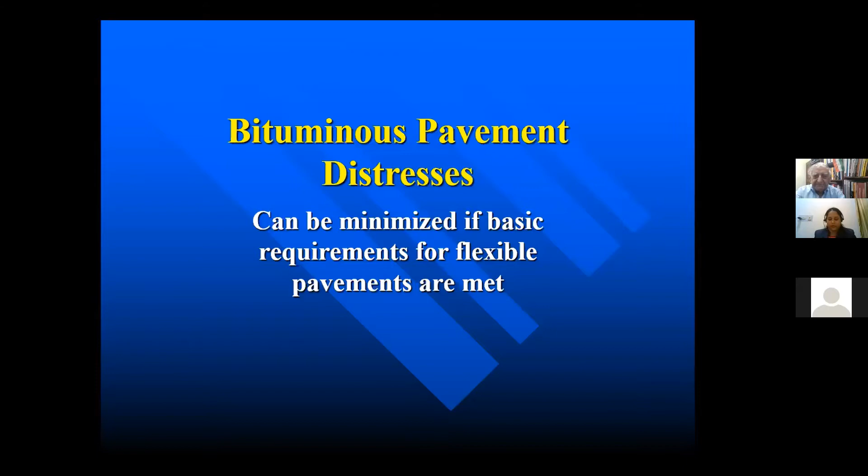Basic requirements for a flexible pavement: as you know, rigid pavement consists of cement concrete, while flexible is bituminous pavement. Three things are very important for the success of a flexible pavement, and these are drainage, drainage, drainage. That means we can never overemphasize the effect of drainage on road pavements.

Second, sufficient thickness and internal strength to carry expected traffic. We have to design our roads with sufficient thickness.

Excuse me, I'll just close the door.

We have to design roads with sufficient thickness based upon the traffic. Higher the traffic, more the thickness. The pavement should be adequately dense to prevent penetration of moisture from underneath, sides, and surface. And the top surface of the bituminous pavement should be smooth, waterproof, skid resistant, resistant to wear, distortion, and deterioration by weather. These are some of the fundamentals we have to keep in mind.

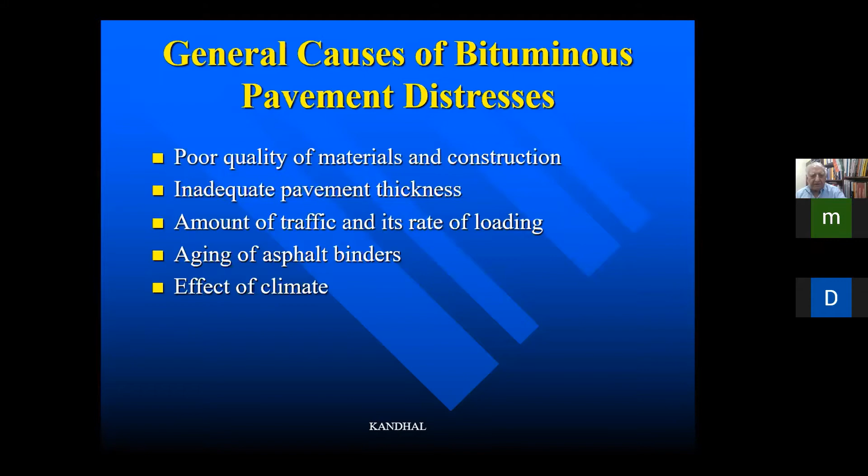Everything has a life to it. Then the effect of climate is important. If you have more freeze and thaw and wetting and drying, they do have a toll on the life of the pavement.

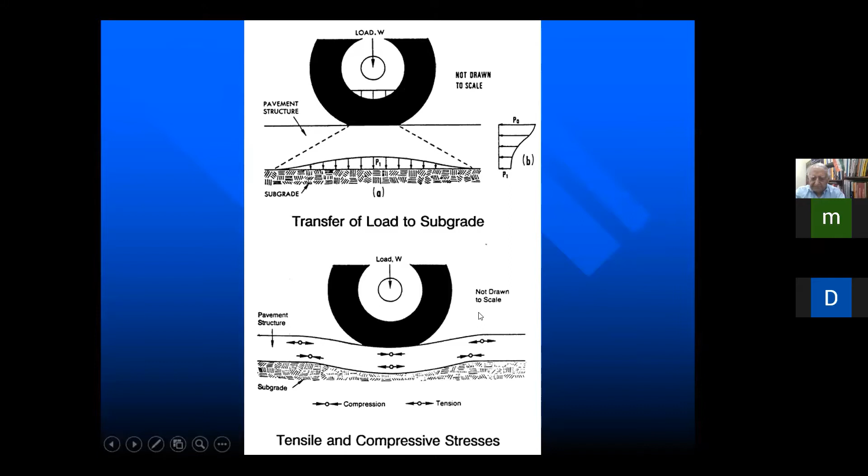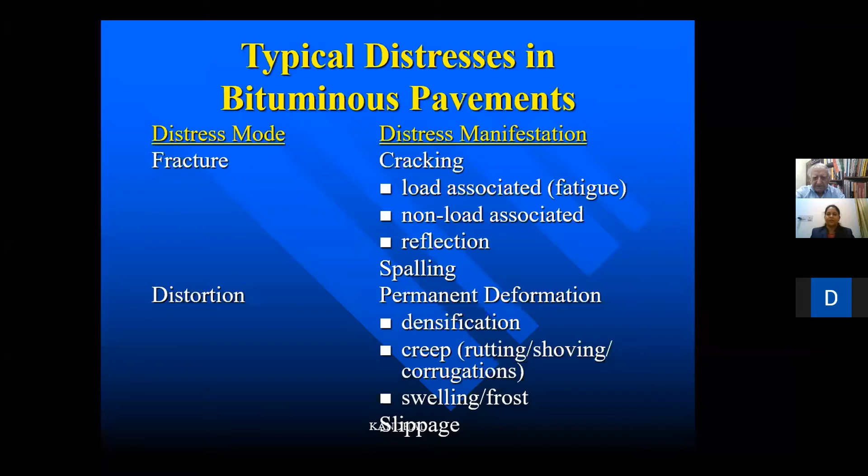Then we also have slippage, which is also a kind of distortion. The third distress mode we have is disintegration — the pavement is just falling apart, disintegrating.

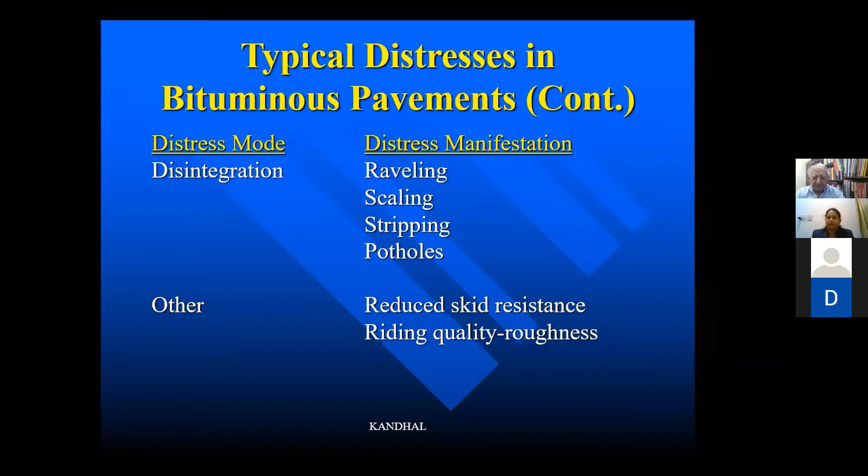So now we will talk about each distress I described in that table. Let me talk about cracking of bituminous pavement — that's like a fracture, the distress is fracture.

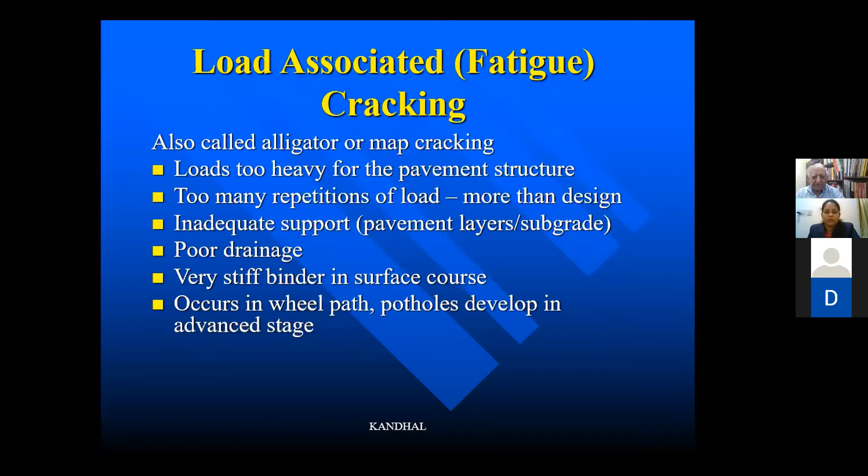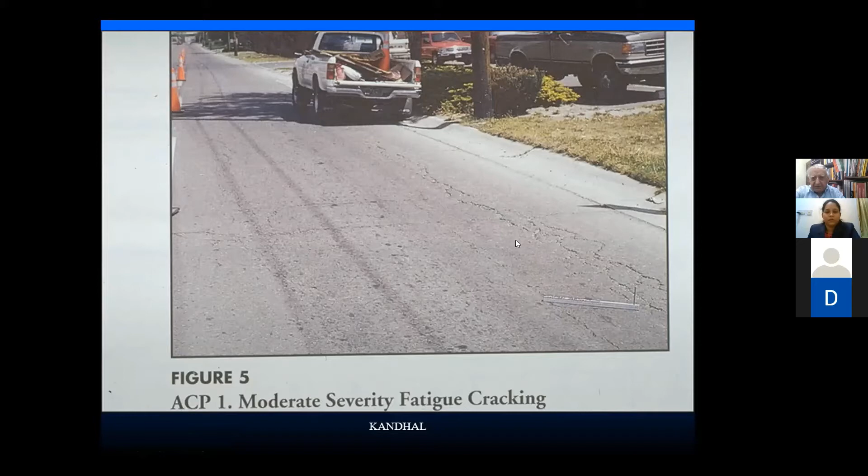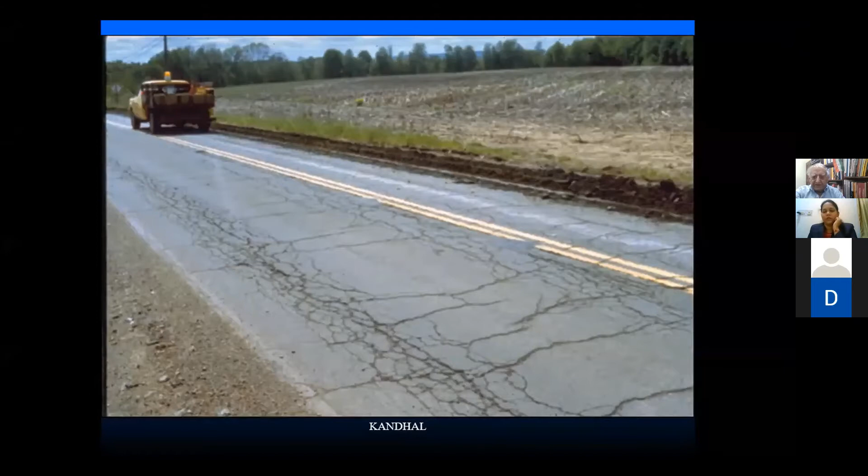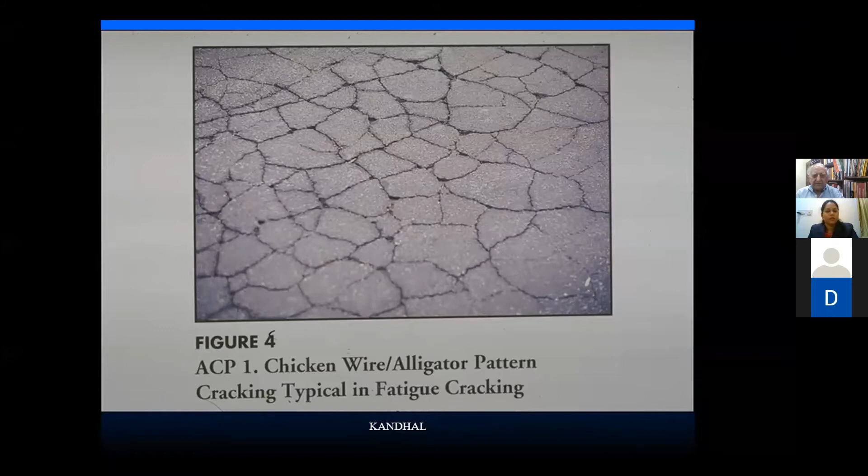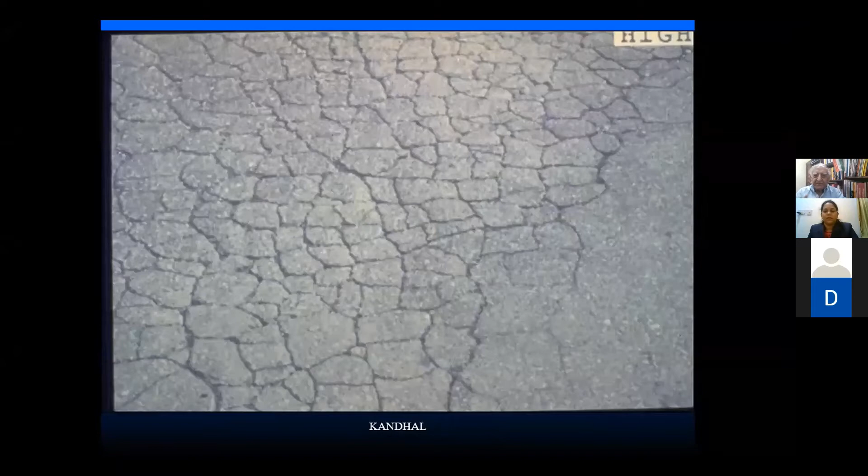Here is a close-up of the fatigue cracking. As I mentioned, we also call it chicken wire or alligator pattern type cracking, which is typical in fatigue cracking. Here is another example of the alligator type cracking. Once it's in an advanced stage, that's how it will look.

So that was the load associated cracking. Now I'll talk about non-load associated cracking. It's also called thermal cracking because of the temperature. Transverse cracks will occur at regular intervals because asphalt binder is too stiff at low service temperature.

This kind of thermal cracking will occur in areas like Ladakh and Leh in India. We are not concerned about this in most of India, only in the Ladakh, Leh area we have to take care of this. I had the privilege of conducting a workshop for the Border Roads Organisation in the Leh area, and my thrust in the talk was how do we build roads in high altitude, low temperature conditions. This was one part of the problem we have as thermal cracking, because if the binder is too stiff at low service temperature, then it will happen.

It will also happen due to rapid chilling of the road surface. If a cold front comes from the north, which happens in the northern tier states of the United States, there is no Himalaya between Canada and the USA, so chilling winds, cold winds, come all of a sudden from Canada to the United States and cause this kind of problem.

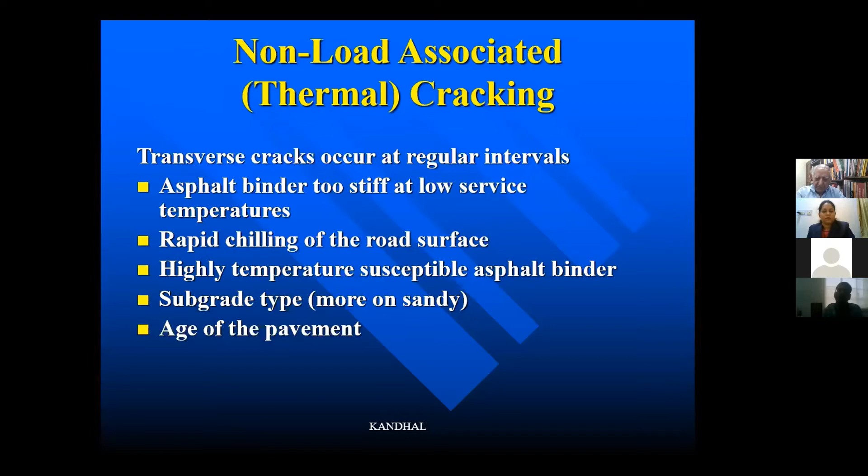Subgrade type matters: thermal cracking will be more frequent on sandy subgrade than clay. Also, the age of the pavement matters, as the asphalt ages it oxidizes and becomes stiff, so it cannot give in when the pavement is cool. This is mostly relevant for the BRO, Border Road Organization, in the Ladakh area.

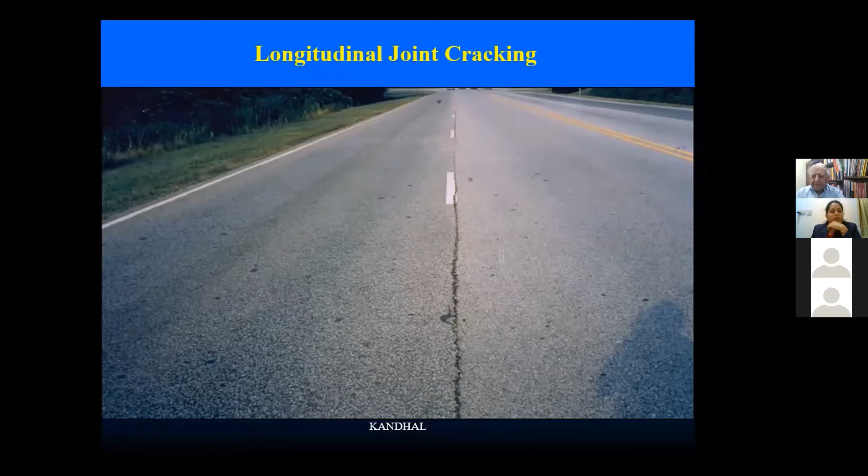There are many different ways this longitudinal joint can be constructed so that no crack happens. I had the privilege of investigating 8 different types of construction joints in the US, and I published 5 or 6 papers on those, covering different techniques for how you can minimize or eliminate this cracking. So this is the joint between adjacent lanes, occurring because of the density gradient across the joint—low density and high density. This will occur, and sometimes you'll see it more on airport runways because there are so many joints there.

Pardon? Can you hear me? Mazula sir, can you hear me? Yes, sir, yes, sir, you can. Okay, there was some voice, that's why I thought—yes, some participants unmuted, okay.

So this is a construction joint which we have to take care of by properly constructing it. Then there's also edge cracking, which I'll show you a picture of—it happens when we widen a road. It can also happen because of lack of lateral support, and lastly, it can happen because of poor drainage, when I don't have good ditches to take care of the surface drainage on the side.

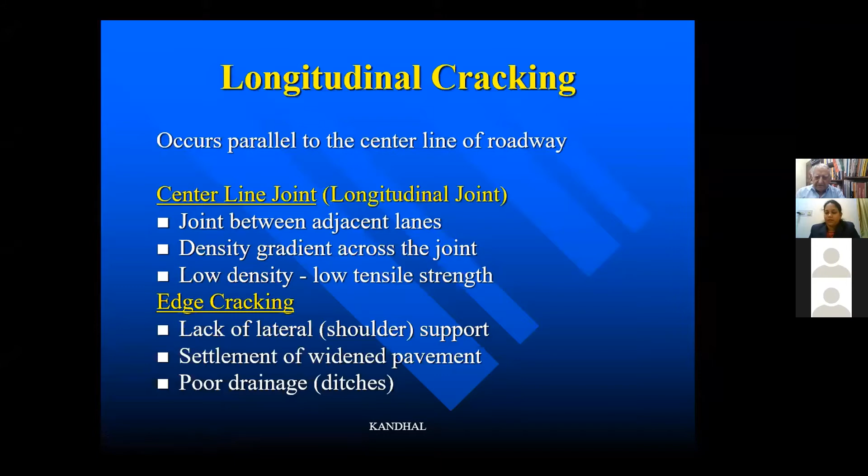This pavement was up to here, and then I widen it, maybe using different types of materials. After doing it like 8-10 years, I may not have the same kind of material, but still this will happen because I widened it. So this crack will always happen. It's called edge cracking, and we have to seal it off all the time.

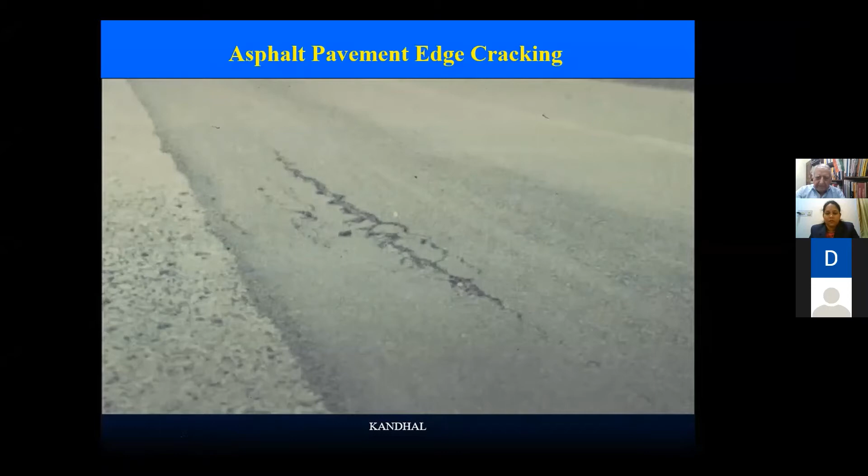Then we talk about block cracking. In block cracking, we have both transverse and longitudinal cracking. I'll show you a picture of that. Most often it's on low volume roads or parking lots where there's hardly any traffic, because thixotropic hardening or structuring of the asphalt binder takes place due to lack of traffic and heat.

Let's say if I build 1 kilometer of road and don't put any traffic on it for 2-3 years, and then I build another kilometer of road and open it to traffic, you will see after 2-3 years that the 1 kilometer of road which didn't have any traffic will develop this kind of cracking, because the asphalt bitumen binder develops a structuring, or hardening. It acts like cement concrete. And as you know, if I put cement concrete and don't provide any joints, it will crack. So that's what happens here.

So asphalt does need some traffic and heat. If you can heat up that bitumen layer, it will be restored back to its softness. But we cannot do that. So this is what happened here.

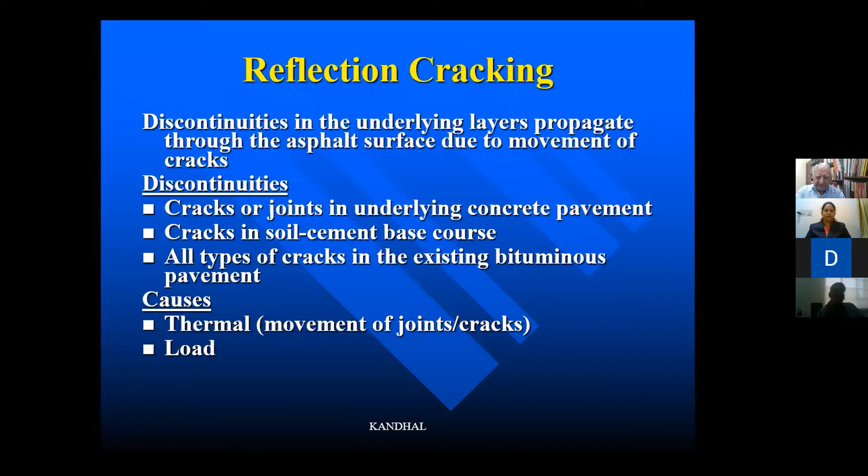So if you are going for a forensic analysis, somebody asks you, okay, what is it?

Is it a thermal crack or a reflection crack? I don't want to speculate. In forensic science, you should not speculate - that's what we mostly do in India, somebody goes out and says 'oh, this is what it is' and then you take care of that. I believe in verifying it, and understanding why it happened before I treat it.

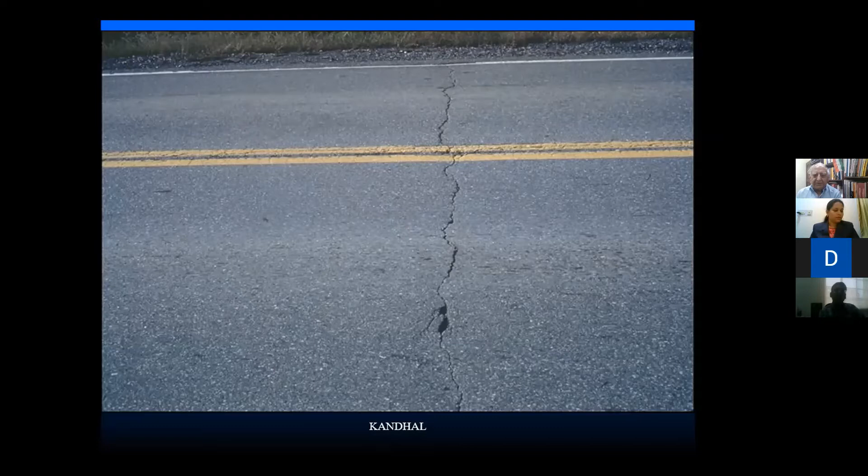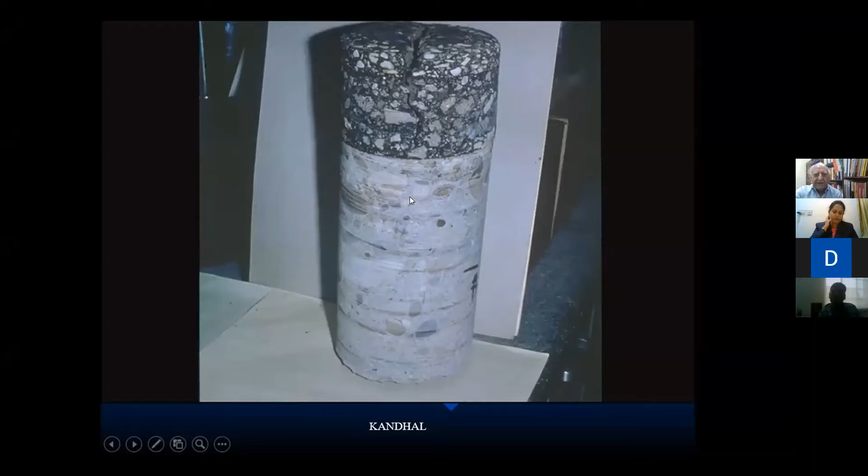So what I'll do is take a core right on the crack itself. Here I took a core, and there was cement concrete underneath. The crack you can see in the bituminous concrete here, but there is no joint here. If it was a reflection crack, I would see a joint or crack in the cement concrete. I don't see it here, so it's not a reflection crack, it's a thermal crack. That's how we find it.

Now, how do we treat this? Suppose we have a cement concrete pavement and want to put an asphalt or bituminous overlay on top - I know that reflection cracking will occur. One method highly successful in the US is that when I put a bituminous wearing course on top of cement concrete, right over where the joint was in the concrete, I saw a joint and seal it with a joint sealant. So I'm already creating a weak line there, so when reflection cracking takes place, it will take place there, where the joint is already sealed. That's one way we can take care of this.

So how do we take care of the cracks? Cracks should be sealed as soon as possible, so there is no water penetration in the pavement which may cause further damage. As I said, water drainage is very important, so we must seal the cracks as soon as possible. If it's very narrow, 2 or 3 millimeters, we cannot seal it, but when it becomes somewhat wider, then we can seal it.

Asphalt rubber is considered the best material for sealing cracks. Unfortunately, we don't have that in India, and mostly people put asphalt binder like VG10, VG30, or emulsion, and that doesn't work out. It's always the case that when the joint narrows due to expansion, the sealant comes to the surface and gets tracked by traffic. And in emulsion we have 35% water, so that evaporates. So what we need in India is asphalt rubber as a crack sealer.

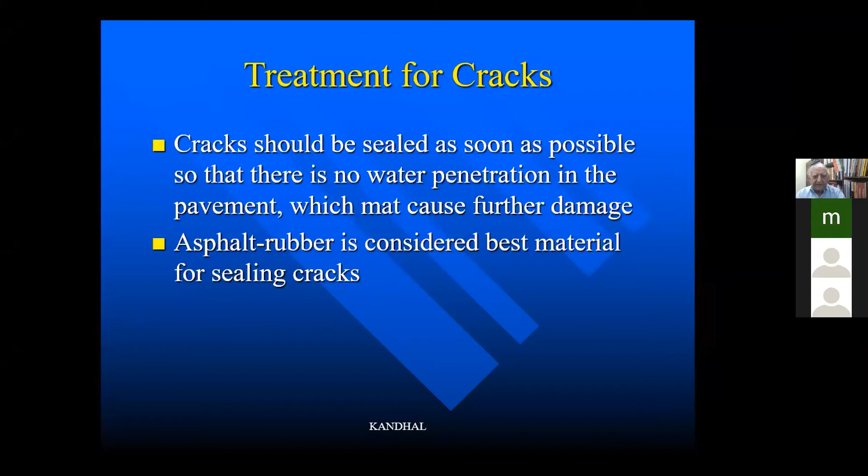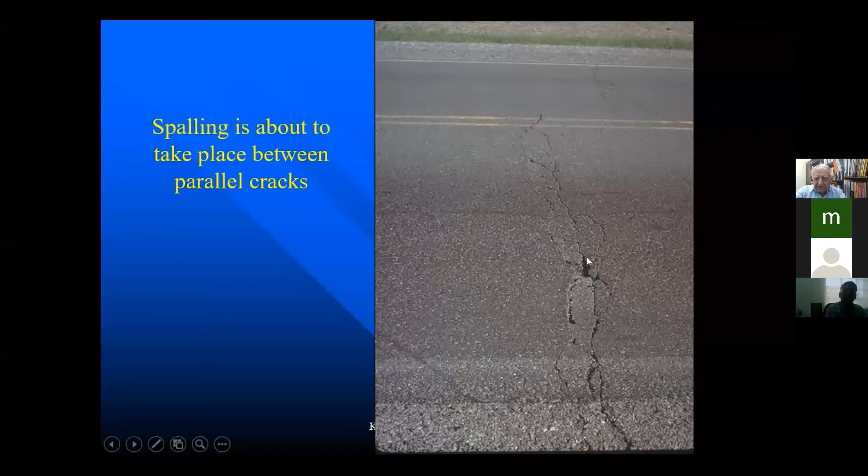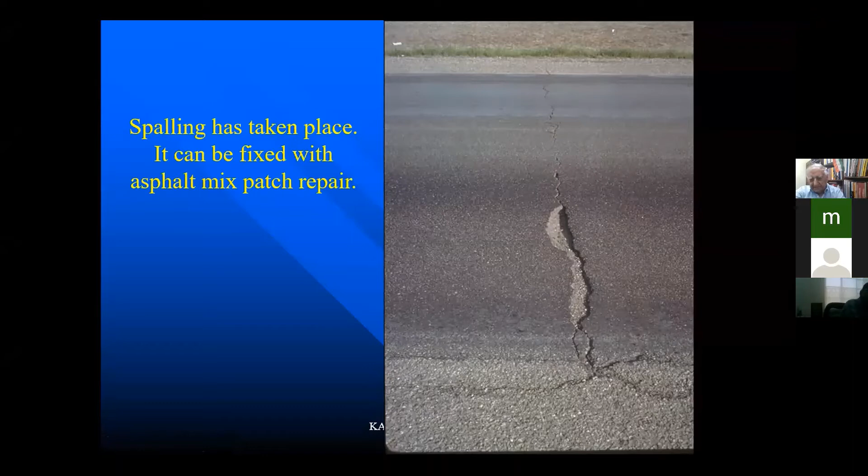So if I have a crack here, you can see it. If I don't take care of sealing it, as it develops, it will develop secondary cracks because I did not seal the primary crack. And once that happens, I can get spalling, because between the two cracks, the material is spalled. So we must seal the crack as soon as possible - as they say, a stitch in time saves nine. That's what happens here. Now we will talk about rutting.

Rutting can occur because of lack of adequate subgrade support. Those who know about pavement materials know we have the subgrade at the bottom, which is the natural soil. If that is not very strong, it won't provide good support, and so the whole bituminous pavement which I put down will settle down and cause rutting - ruts on the surface. So that's because of the subgrade support, and I'll show you how to identify what's happening, at least roughly.

Rutting can also happen because of an unstable asphalt course. If the bituminous concrete or asphalt concrete course is unstable, that means I didn't do a good mix design, so the mix is very unstable. Or I used rounded aggregate - I need to use angular aggregate in my bituminous layer so it has good strength. Or I put too much asphalt binder, too much bitumen binder. All these can cause an unstable asphalt course. The underlying layers might be okay, everything's okay, but the bituminous layer isn't strong enough.

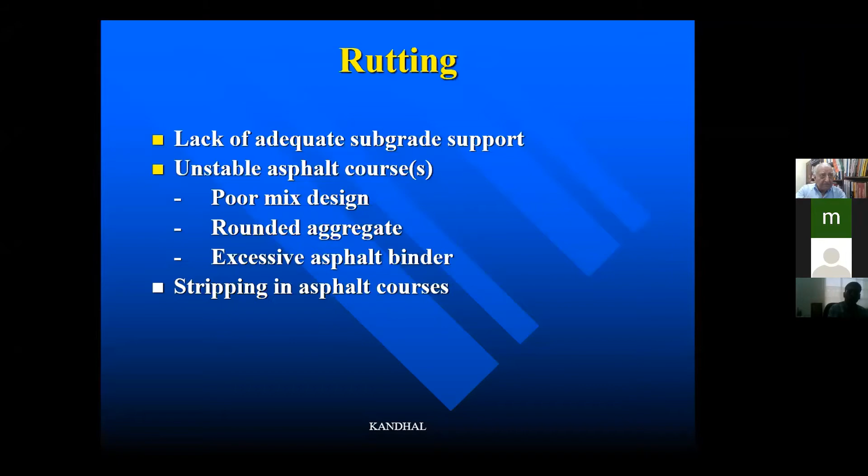My mix design was bad, so all the binder kind of came up on the surface and caused bleeding. We have to take care of the bleeding, because if it is wet, vehicles can start to skid on top of that.

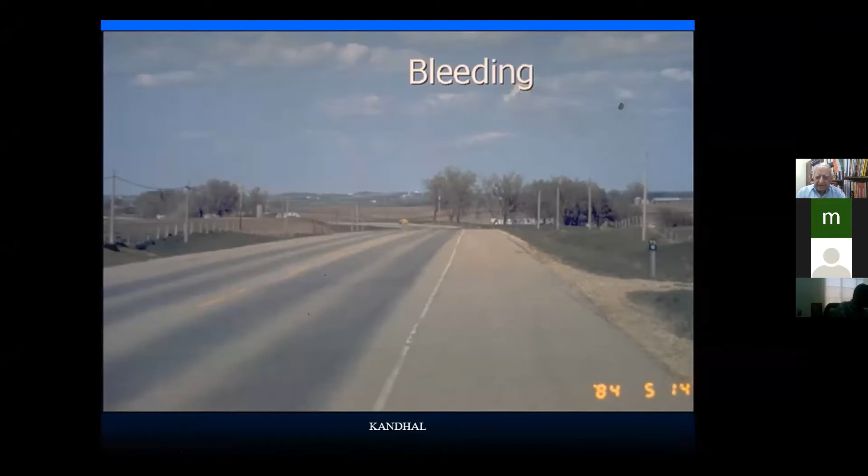Here's another example of bleeding. You can see here again, it's in the wheel track area. So bleeding sometimes can lead to rutting, and sometimes it may not lead to rutting, but still it's not a desirable surface phenomenon. How do we treat the bleeding?

Let's say it happened, I put too much binder there or whatever. So what I can do is apply hot sand and roll it during hot weather to blot out the extra asphalt binder, bitumen binder at the surface. You can do it one time, if that doesn't work, do it a second time. And then after you do that, you just pray to God. It might work, it may or may not work.

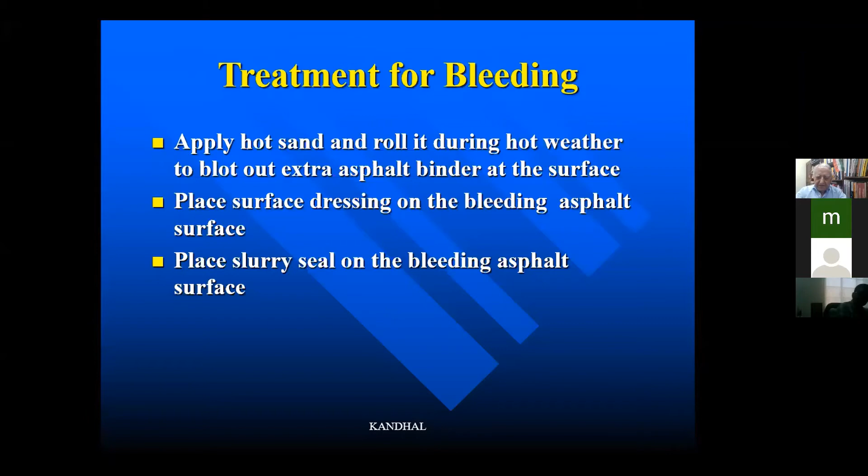If it doesn't work, then you have to do something else, like place a surface dressing, what you call chip seal, on the bleeding asphalt surface, or you can put a slurry seal or micro surfacing on the bleeding asphalt surface. You can do that, but it is not desirable. We got to take care of that.

Now here we are talking about rutting. We said rutting can happen due to a subgrade which is not strong. Rutting can also happen because of the bituminous layer not having enough strength or whatever.

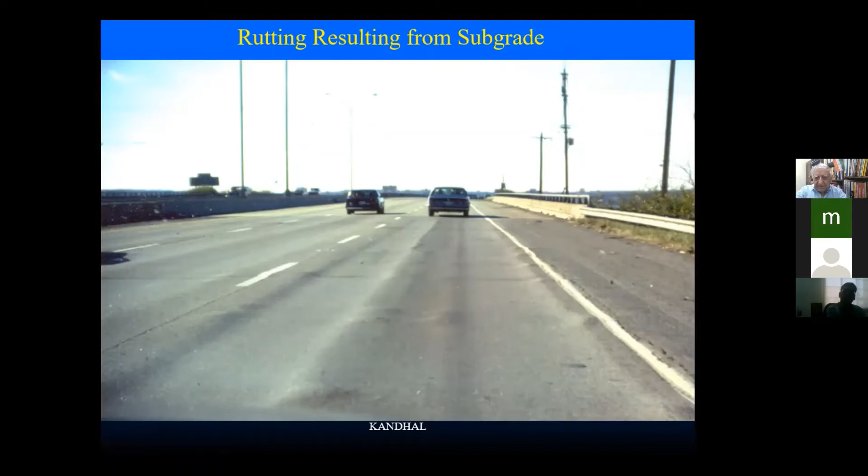But again, you can identify the problem by doing some more exploration. I'm just showing you a picture which can sometimes give some hint why the rutting is taking place.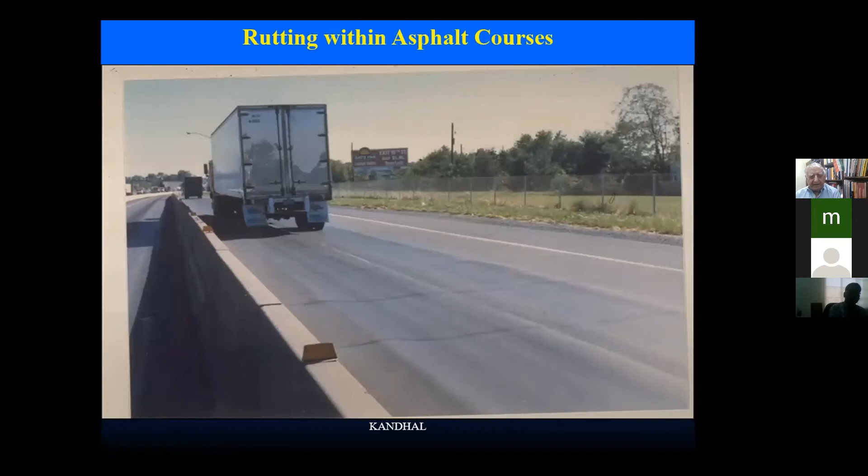Now this is a picture on a national highway in the US, and you can see a lot of rutting in here. But since the rutting here is very, very smooth, you can see there's a flow of the mix on the side, a hump is there, but very smooth. So I would suspect that this rutting is being caused in the bituminous layer and not due to subgrade.

Now here is some forensic analysis which I did in Pennsylvania, between Philadelphia and Pittsburgh. There's a Pennsylvania Turnpike, which has a lot of traffic on it, and it was made of cement concrete, and they laid a bituminous course for the first time on cement concrete.

First they put a leveling course, which was 25 millimeter leveling course. Then they put a binder course, which was 50 millimeters thick, and then they put a wearing course, which was 37 millimeter thick. For the first time, they put these 3 layers on the cement concrete pavement. It's a 4-lane highway with lots of traffic, lots of truck traffic.

So these are the 2 lanes which are open to the traffic. The other 2 lanes are on the other side of the ridge, and they were under construction. So only 2 lanes were open for the traffic which was previously plying on 4 lanes. As soon as they opened this to the traffic, there was about 25 millimeter rut in the wheel track.

So they asked me, being the chief asphalt road engineer in the state, and they called me out, and I went there, and they said we got 37.5 millimeter wearing course, surface course, and below that we have 50 millimeters of binder course. So which one should we remove?

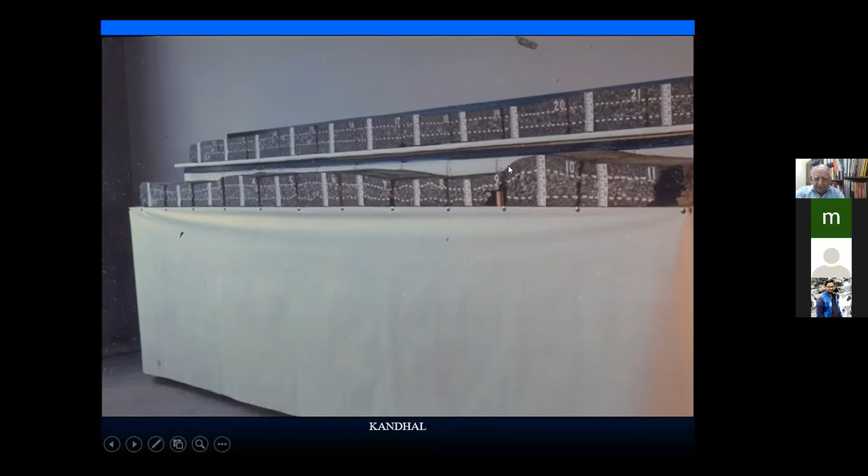You can see here a close-up of this rut, there's a hump here. And you can see in the close-up, here's the rut. You can see the surface course is uniform in depth - no rutting is taking place in the surface course. The rutting is taking place in the binder course. You can see the binder thickness is lower here, and it's humped over here. So this rutting is taking place in the binder course.

So in this case, I have to remove both layers. Although the wearing course, the surface course, is okay, the binder course is causing the problem, so I have to remove that. When I remove that, this is also removed. So if I had advised them to remove only the wearing course, surface course, that would have been wrong advice. This is what you got to do sometimes - you have to do some extra legwork to find out.

Now the second question is, okay, I told them it's the binder course that's the problem. So why is it occurring in the binder course and not in the wearing course? What's the problem? You can see that in the next slide, please.

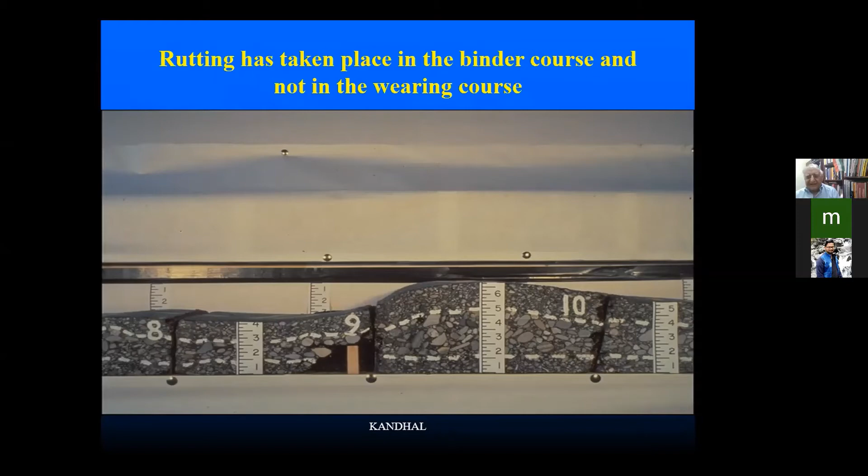By mistake, they used a wrong stockpile of aggregate from Ohio. Ohio was a nearby state, and the contractor, by mistake, used a wrong stockpile which consisted of rounded aggregate, and he ended up using that in the binder course. So you can see here, that was the cause. This is the kind of forensic work you have to do, and for that you have to make some extra effort. You don't want to speculate, you've got to see it for yourself.

Here you can see, just roughly, the kind of rutting can tell you something about what's happening - though not always, you've got to verify it. Like on top, there's a plastic movement depressed in the wheel path with humps on either side. That would tell me the rutting is taking place within the bituminous layer, whether it's the surface course, binder course, or base course. Now below that, I have this kind of rutting, and that tells me it's happening because of the consolidation or densification of the bituminous layer in the wheel path. It's just densification.

There's no movement, no humps in it. At the bottom, you will see mechanical deformations because of the subsidence of the unbound base course or subgrade, and that part is causing the problem. So there's a settlement here of the bituminous layer because the subgrade is giving way. That's the kind of example I gave you before near the bridge approach. So that's what's happening there.

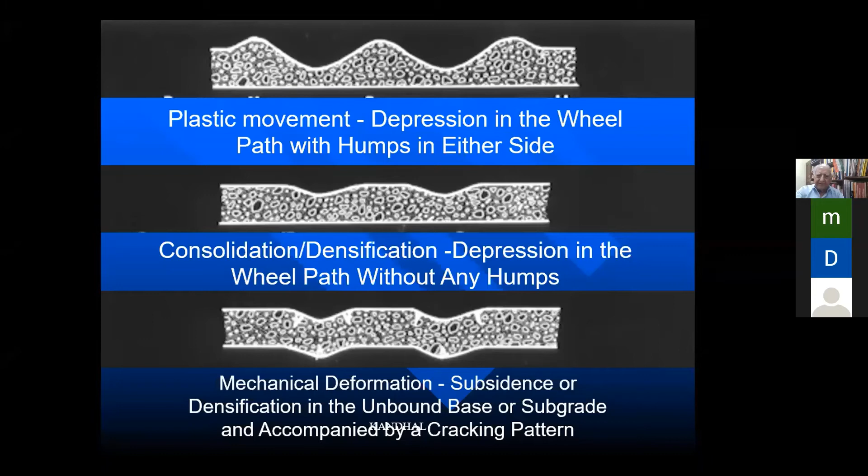These kinds of things can give you some idea, not 100% correct, but some idea about what's happening. But you don't want to speculate on that. You've got to verify that by digging up a trench and making samples.

So how do we do the treatment for rutting? Rutting is taking place, what do we do? You can't just go out, take a look at rutting, and say okay do this or do that. That involves a lot of expenditure. You have to go confirm. You've got to diagnose the problem - that's the forensic analysis, you've got to diagnose. Only after you diagnose the problem can you treat it. Otherwise you are just doing something which may or may not work.

So first, determine the cause and location of rutting. What is causing the rutting? I've got to find that out, only then I can treat it. Any layer exhibiting rutting must be removed or milled off - we have milling machines these days in India also, no problem - completely and replaced with a more stable mix course. So if rutting is being caused by the bituminous layer, you just remove it and design a better mix.

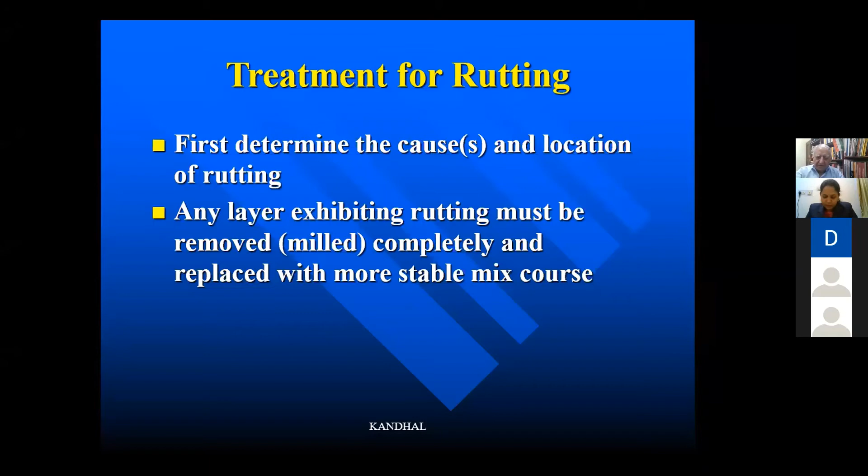Okay, so we have handled rutting and cracking in detail. Now we'll talk about slippage cracking. It's associated with a slippage mechanism because there was a poor bond between the surface layer and the underlying layer.

We normally apply tack coat. When I put a surface course, bituminous surface course, on top of the bituminous binder course, I apply tack coat so there's a good bond between these two. But if I apply too much tack coat, it acts like lubrication. If I apply too little tack coat, it may not give me the bond. So in that case, slippage cracking can take place.

Mostly it will occur on steep grades or intersections. It won't occur on level ground, sometimes it might for other reasons, but mostly it occurs at steep grades or intersections because acceleration and braking exert surface traction force, and they cause relative movement of the surface course against the binder course underneath. They are U-shaped - when you look at this slippage cracking, it appears to you like a U-shape.

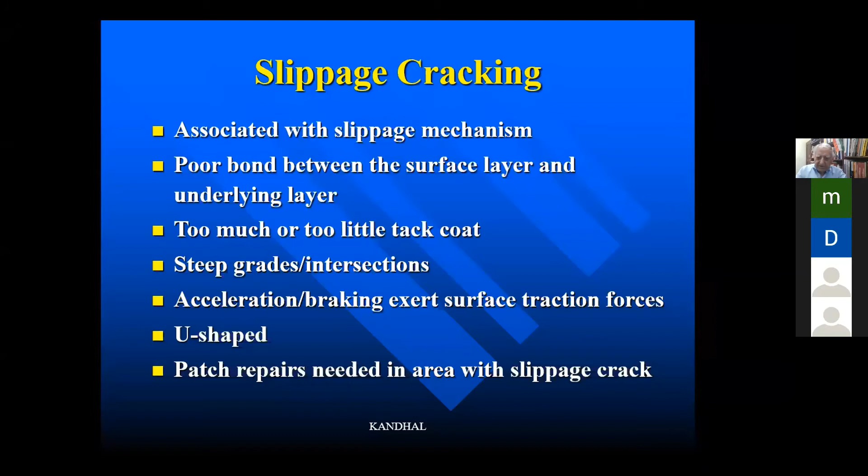So in the area which has slippage cracking, you just dig it out, do some patch repair, and that takes care of the slippage crack in that area because they are not continuous. So here is an example of a slippage crack.

Here you don't see the whole road, but the road is kind of going up or down here. Here's the U-shape, and the traffic is going in this direction. In the US, the traffic is on the right side. So if there is a U-shape here, and traffic is going this way.

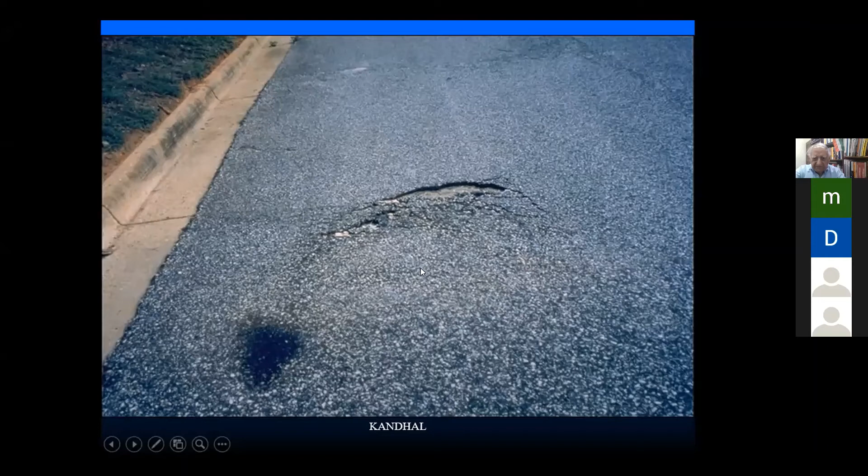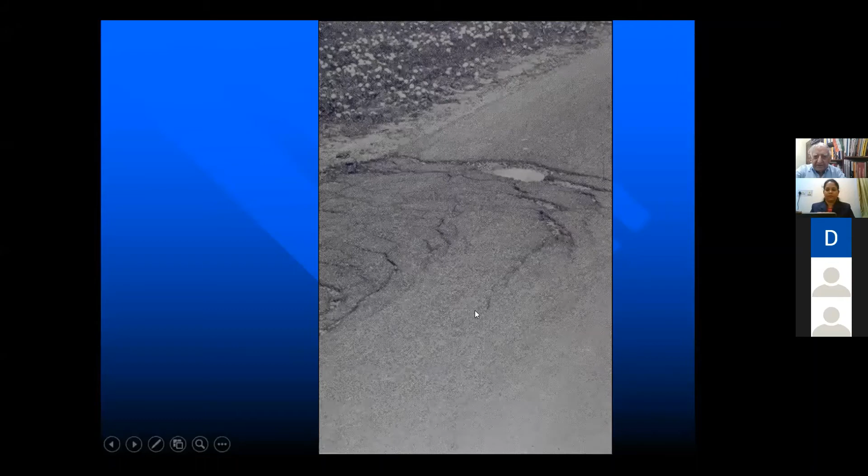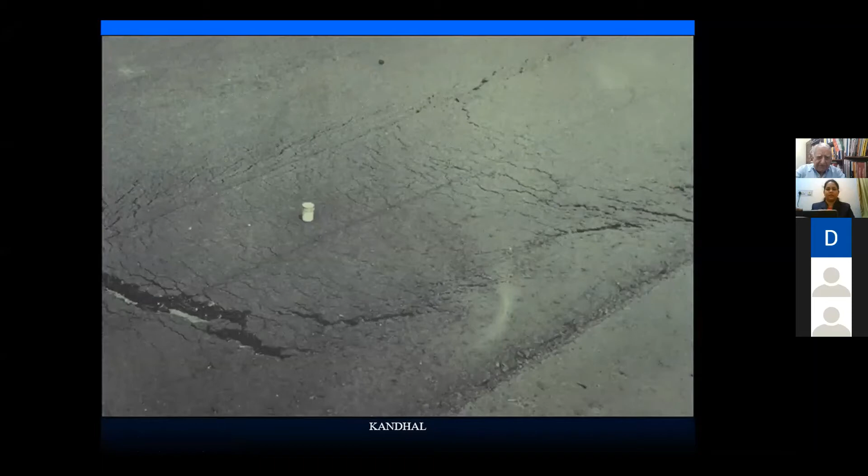Another example of a slippage crack. And again, to correct it, you just dig it out in this area, do a patch repair, and that takes care of it. Another example of a slippage crack. I don't know, I've not seen too much of these here in India, actually.

Now here's some cracking called hairline checking. I'm just throwing in these things because you might encounter them. This will happen when I'm compacting the bituminous concrete - if the bituminous concrete is hot, too soft, then under the roller I might get this kind of checking. So I've got to do something at that point during construction so that I don't end up with this hairline checking or cracking, because later on they can develop and widen and give me problems. It has to be taken care of by either delaying the compaction or doing other things with the mix design - that's another subject.

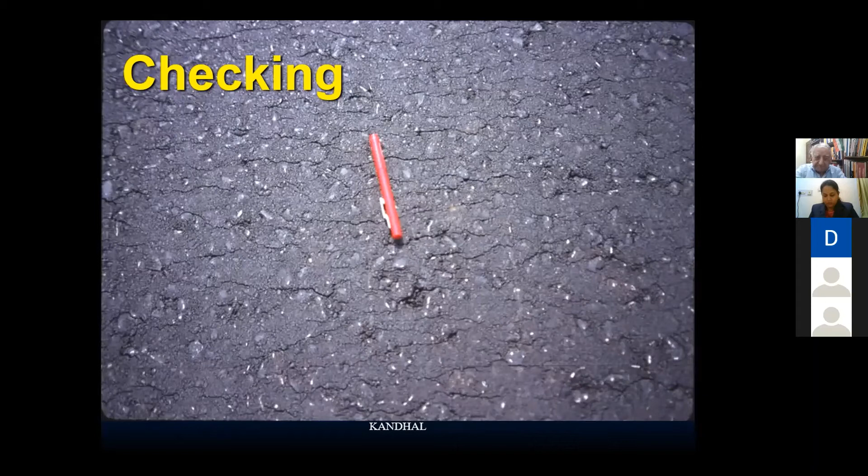I might have corrugations, and that will also happen due to a lack of bond between asphalt courses because of the unstable surface course mix. It will corrugate - you will only feel the corrugation when you are driving, the car will just go thudding. It will happen because of braking and accelerating action near intersections, where you're applying brakes because the traffic light goes from green to red. Areas with corrugations have to be milled off and replaced with a highly stable asphalt mix - that is the cure for that.

Now we come to raveling, which is like a disintegration of the bituminous pavement. That's what we will cover now - raveling, stripping and all that. Raveling is a progressive disintegration of the asphalt surface as a result of dislodgement of aggregate particles in the mix.

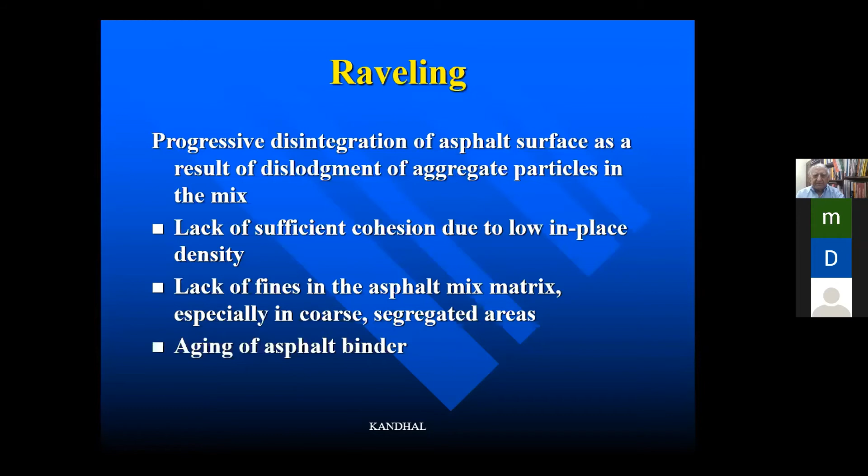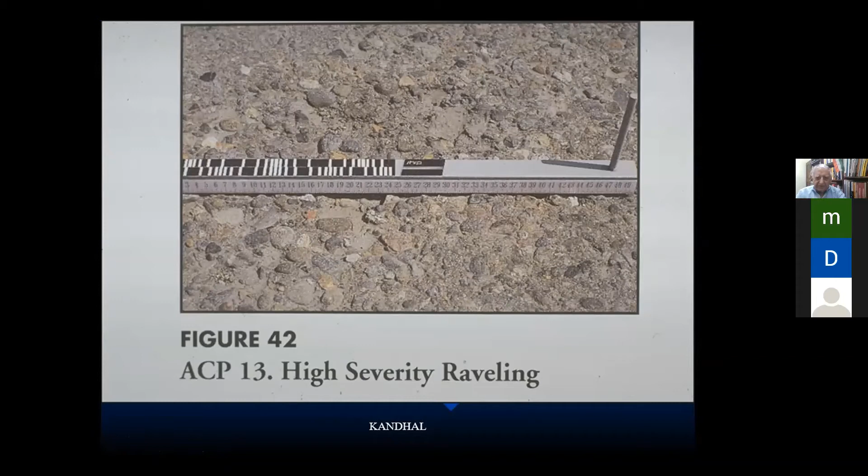Now here is a case of high severity raveling. In this case I not only lost the sand, I've lost some bigger particles as well - you can see these pockets here. So I should have taken care of the raveling when it was slight, but I didn't do anything much about it. Now it has become so bad, it has become severe here.

So how do I treat the raveling? The following treatments are suggested in order of severity of raveling, from slight to severe. If I just have slight raveling, I can apply a fog seal with diluted emulsified asphalt binder.

That's the asphalt with water and asphalt. So I apply just a fog seal, and that will take care of it for 2-3 years. It will provide some binding agent on the surface, so I won't have too much loss of the fines, at least for like 2-3 years.

Not more than that. If it's too bad, then I apply a slurry seal or micro surfacing, which is available in India as well. Or I can put an overlay with a dense grade asphalt mix. I can do that too, depending on how much money I have, and depending upon the pavement, whether it's designed for that traffic at that point in time or not.

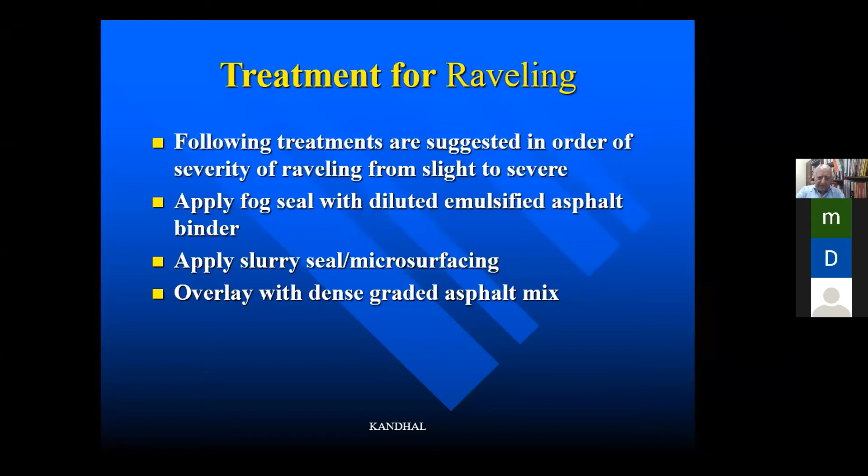In India, there are two mixes which are really bad, and we are still using them. On top, we use a mix called SDBC, semi-dense bituminous concrete, 25 millimeters of it, and since it's semi-dense, it can still absorb water. Water is enemy number one of bitumen. Below that, we use BM, bituminous macadam, which is very open and can also take up water. I've been campaigning for the last 15 years to remove these two items from our specification, but the Ministry of Road Transport doesn't listen.

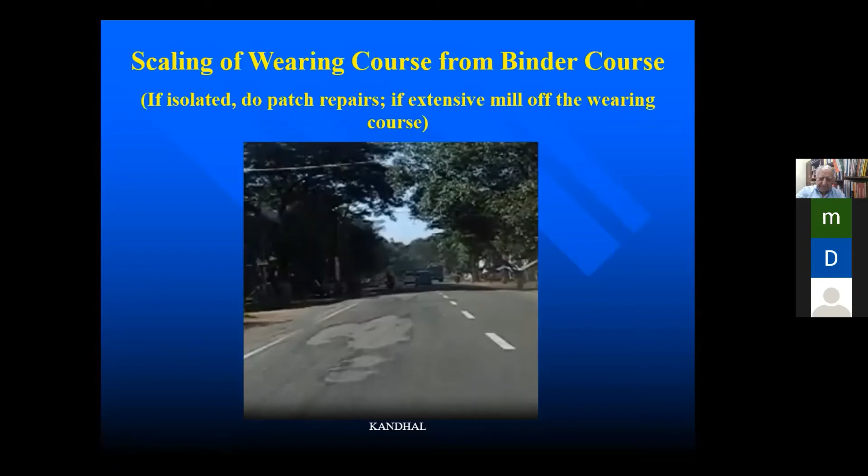Now we come to the problem of stripping, which is very important, and I'll show you some case histories of this problem. Stripping is the breaking of the adhesive bond between the aggregate surface and asphalt binder, usually in the presence of water or moisture. Most of the time it is because of that. The aggregate, except for limestone, loves water and hates bitumen.

So if water is there, it will replace the bitumen. If I have a sandstone or granite aggregate coated with bitumen, and water comes in, the aggregate loves water, so it will take on the water and remove the bitumen binder, peeling it off. The water gets in between the bitumen layer and the aggregate, because the aggregate loves water in that case.

If I have an inadequate pavement drainage system, then again stripping will take place. So pavement drainage is very important. As I mentioned this morning, along with Dr. Sivakumar Babu and others, we wrote a textbook on pavement drainage, published in the United States about 2-3 years ago, where I've given some case histories and forensic analysis I did in the US. Again, it's due to inadequate pavement drainage system, both surface drainage and subsurface drainage.

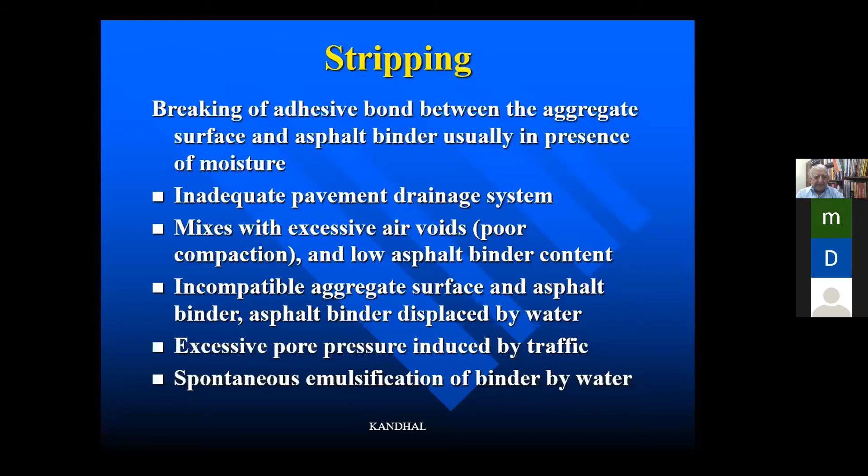Excessive pore pressure induced by traffic: if stripping is taking place and the traffic is very heavy, it will accelerate the process of stripping. Lastly, which is very rare, sometimes the water can emulsify the asphalt binder, and then the emulsion can be washed away with the water.

Let me show you this case history of a national highway in the United States where I did the forensic analysis. After this was put down, after 2-3 years, they had this kind of problem. You can see it's very bad—you spend so much money putting down two layers of bitumen courses, and everything was very good, but within 2 years you see potholes developing and a lot of patching. You patch here, then a new place develops a lot of potholes, bleeding, and all that.

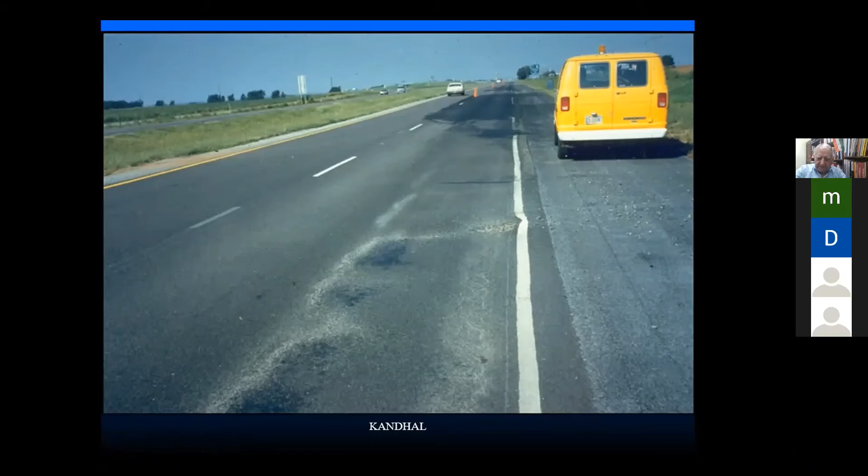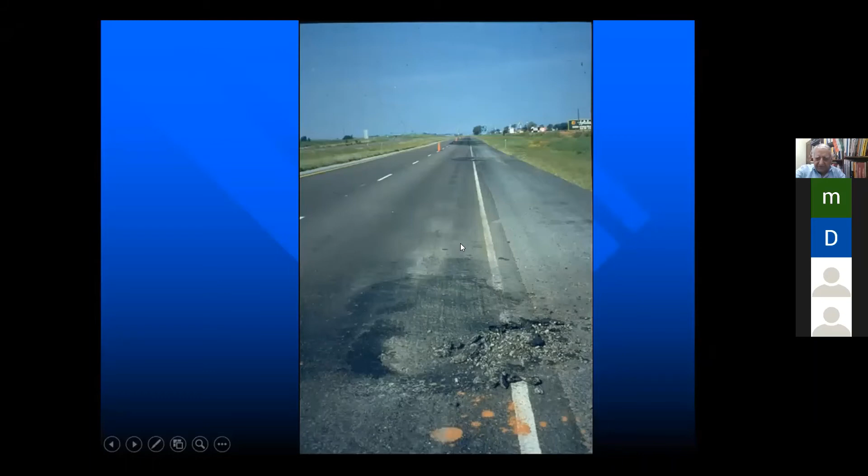Sometimes rutting is taking place, so you are very disheartened. Then you have to call upon somebody to do the forensic analysis to see what's happening, why it's happening within 2 years. This was the case I analyzed, and I included it in that pavement drainage book as well. You can see there's a lot of problem here, a lot of potholes occurring, and patching done here and there. Every time you just keep patching—what can you do? So you've got to find out what went wrong.

Here was a typical case, very hard to find, which I put in the textbook. I also published an international paper on this forensic analysis. It's very rare to find classic signs of stripping, which you hardly see everywhere. I was lucky to see that on this road, and I took this photograph.

First, what we see is that in the beginning, you see a white stain on the road. Then you see bleeding on the road. And then you see the pothole. There are three classical signs of stripping, which you don't see on all roads, but I was lucky to find this place.

So what happens is that in the bituminous concrete, the lower layer starts from the bottom up. In the binder course, the bitumen binder is peeled off because of water action. Once it's peeled off, it exposes the aggregate, and the aggregate has some fines on it. So the fines are brought to the surface by moisture or moisture vapor.

That's why we see the white stain first. You have to ask people who have been seeing this road for the last two years or so, talk with them to find out what they saw first, what they saw next. You have to get some history from them. So they said the white stain appeared first, and then there was some bleeding.

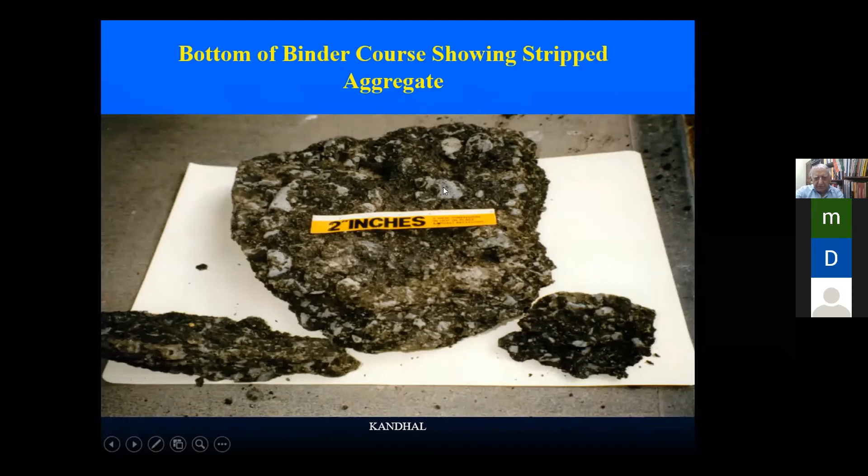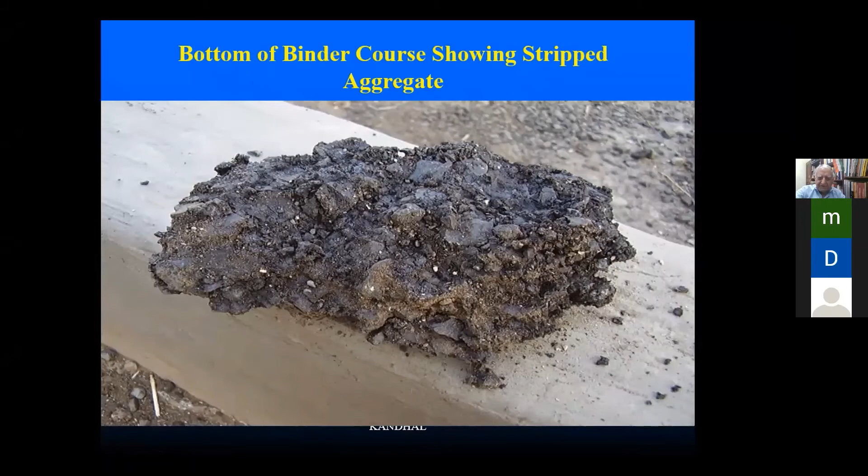Again, it's another example of stripping here. It's like a blackish surface, but you can still see uncoated aggregate particles. This is called stripping, where the bitumen film was peeled away. It looks so dramatic that you cannot believe you put down this hot mix like two years ago, and this is what's happening.

And then the pothole will take place all over. So that was about stripping, and I'll show you one case of this kind in the case history later on.

Now let's talk about skid resistance. My pavement might be very, very good, everything's good, but the vehicles are sliding off when it is wet, causing accidents. So skid resistance is the friction between the tire and the road surface, quantified by the friction number. It's critical when the surface is wet, which makes it very slippery.

Causes for low friction number: if there is flushing or bleeding of the asphalt surface, as I showed before, that causes low skid resistance. If I have inadequate micro texture—the pavement has two types of texture, micro texture and macro texture. Micro texture comes from the aggregate. Once the aggregate is exposed due to traffic within a few months, it exposes the aggregate surface, and if the micro texture of the aggregate is inadequate, it will cause a lower friction number.

This happens more with aggregates prone to polishing because of traffic. Limestones, usually not all of them, are very bad candidates—they tend to polish very, very fast. Sandstone doesn't do that.

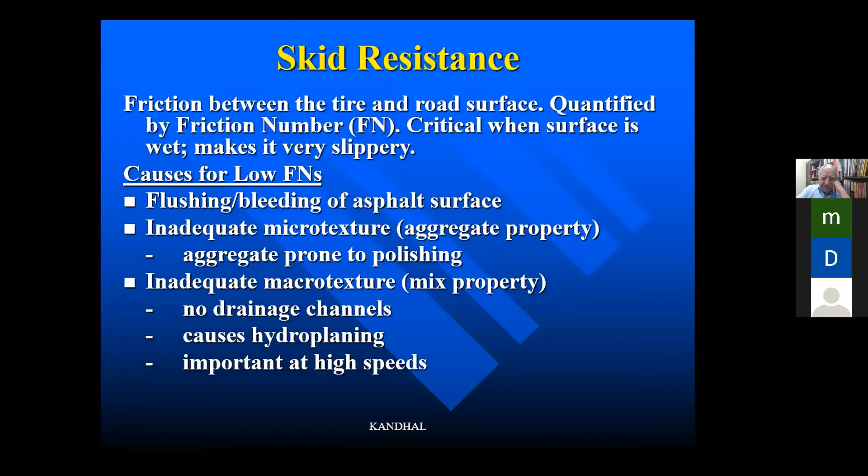It's called hydroplaning, and it's important at high speed. Skid resistance always goes down as you increase the speed, so that's what happens. Skid resistance is important, and in this case it happened due to polishing of the aggregate.

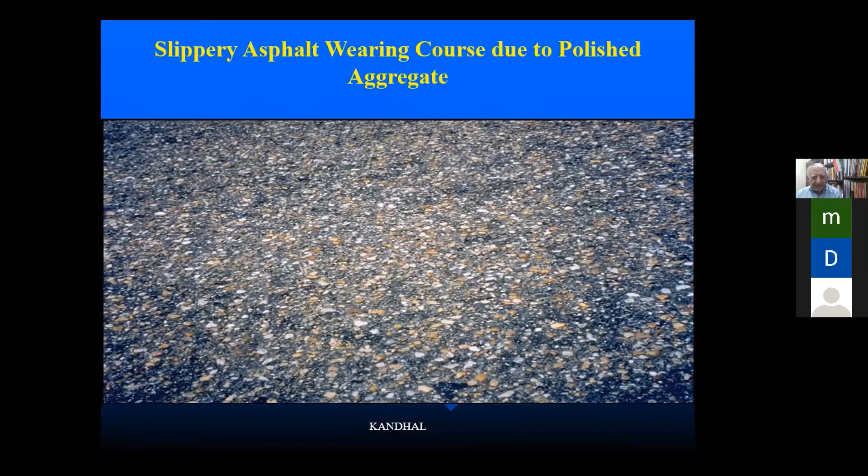It's very difficult to take a picture of a surface with polished aggregate because it doesn't show up in the photo. You only have to see it in person to tell whether it's polished or not.

So what do we do with polished aggregate? If we got polished aggregate, we got low skid resistance. So if we have to do any treatment, we should always use a polish-resistant aggregate. There is a surface friction requirement in our Indian specification, so it must meet that.

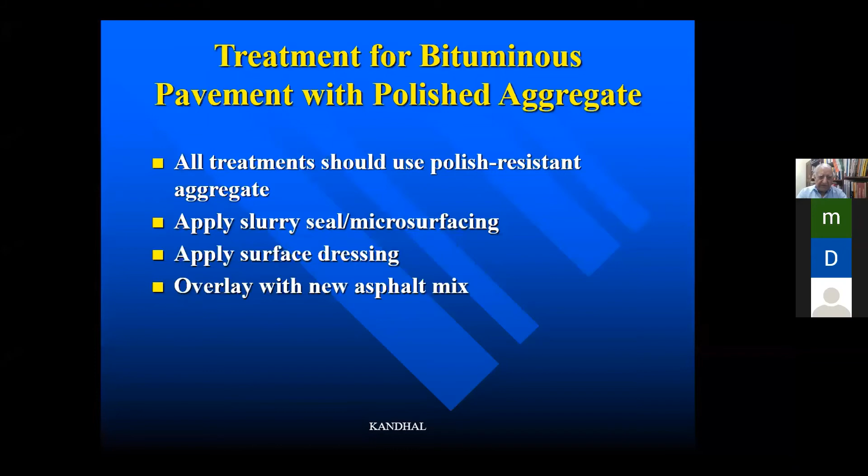We can apply either slurry seal or micro surfacing on the surface which is causing the problem, or apply surface dressing, or we can also overlay with a new asphalt mix.

So this concludes this talk on some distresses which take place on the pavement. We are aiming for this kind of a road, which doesn't have these kinds of defects. The road looks pretty good.

With that, I added - Madhulesha told me to add some case histories, which I have added two of them, to give some idea about forensic case histories and forensic investigation of bituminous pavement across the world.

As I said before, I published the first ever textbook on bituminous road construction in India in 2016, five years ago. You can buy it from Prentice Hall of India, or from Amazon. The main thing I'm showing this picture for is that the last chapter in this book has 8 forensic studies conducted by me across the world, which I think is a unique feature in the textbook.

And that's what I was urging this morning, that whenever we do any forensic analysis, whether it's on a landslide or whatever, we should document everything in detail - what's happening - and then publish it so other people can follow that and minimize that kind of problem in the future.

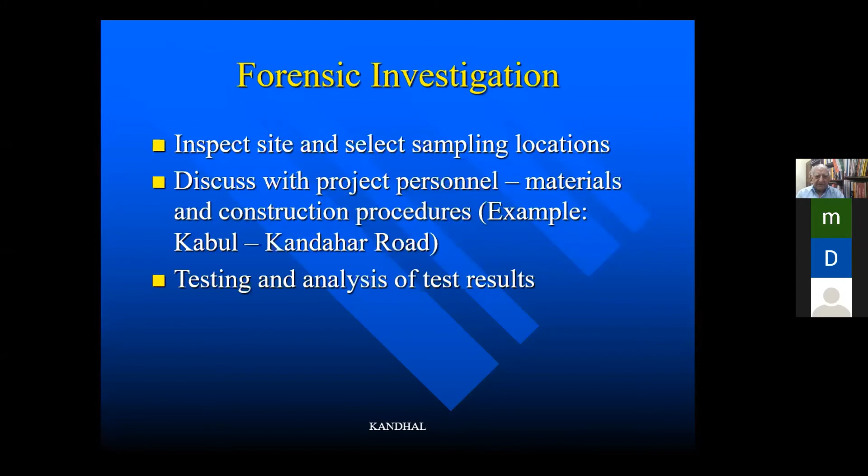So I had to go to Afghanistan and talk in detail with the people who were involved in the mix design and construction and all that. It's very important. Then I came back to Auburn, where I was located at that time, and I was guiding the sampling locations and everything from there, and the testing and analysis of test results. These are the kinds of things we have to do in a forensic analysis.

Now, what I do, which is not in all cases - suppose there's a national highway in India, a 4-lane highway, and it has developed some cracking or rutting problem. What I do is, to identify whether the problem is coming from the bituminous courses, or from the subgrade, or from GSB (granular subbase), or wet mixed macadam (WMM), and all that. If I suspect many layers might be involved, or even if I know it's the top layers, I still do this: I select a 500-meter section and walk on the road, which represents the typical distress I'm seeing.

So that 500-meter section should be selected to show a typical distress. Then I take 5 cores every 100 meters. You can see here core number 1, and do the analysis.

Also, on that project, if you walk the project, you might find a 500-meter section on the same road which is relatively better than the poor section. So I call it a good section, no problem. If I don't find a good section, no problem, I might find a section which is fair.

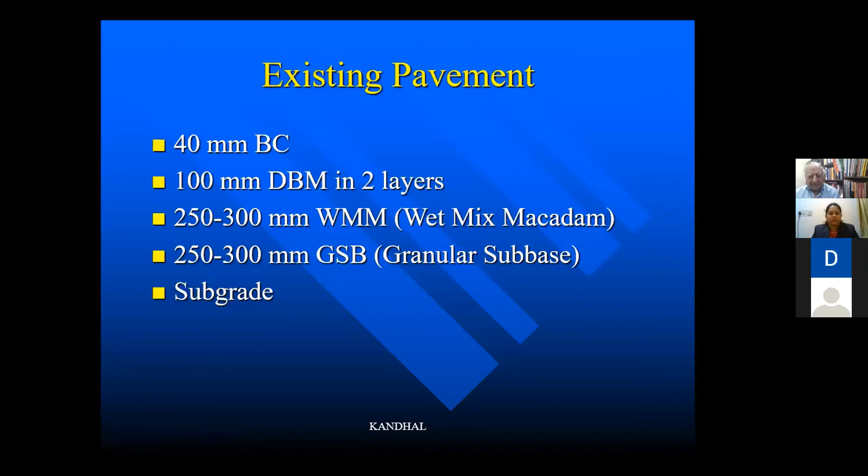What was happening is that all kinds of fatigue cracking was taking place in the wheel track, so they thought something should be done about that. So they brought in hot in-place recycling, called HIPR, which involves these steps. For those who don't know about recycling, what we do is heat the existing pavement and scarify it. Normally we can only do it like 50 millimeters.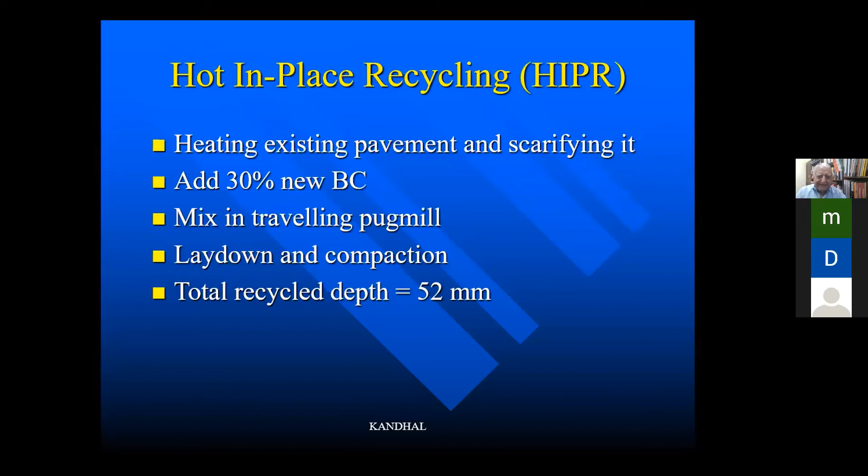The heating doesn't penetrate much, so it might penetrate 45 to 50 millimeters. You heat it to that thickness, and then you add 30% new mix, which is bituminous concrete mix. Then you mix the scarified mix with the new virgin mix in a traveling pug mill. Then you lay it down and compact, and total recycled depth was 52 millimeters in this case.

So it gives you a recycled bituminous concrete. And here is the train which is used in HIPR, hot in-place recycling. I saw that train in the USA, but it's a Tata Hitachi equipment which was brought to India for the first time, and it was the first job they did in Gujarat, which I'm mentioning to you. It's very expensive, it runs in crores and crores of rupees. So Tata Hitachi collaboration, they got this equipment.

The train is moving in this direction. First there's a heater, an infrared heater, kind of heating the surface. Another heater, because you cannot heat too much at once, you have to heat the bituminous concrete gradually. If you heat too much, it will burn the bitumen binder. So the second vehicle is also a heater, and the third vehicle in this train is also a heater, and there's also milling equipment to scarify. You're milling. Now your wearing course is very, very soft due to heating, so you can scarify and mill it off.

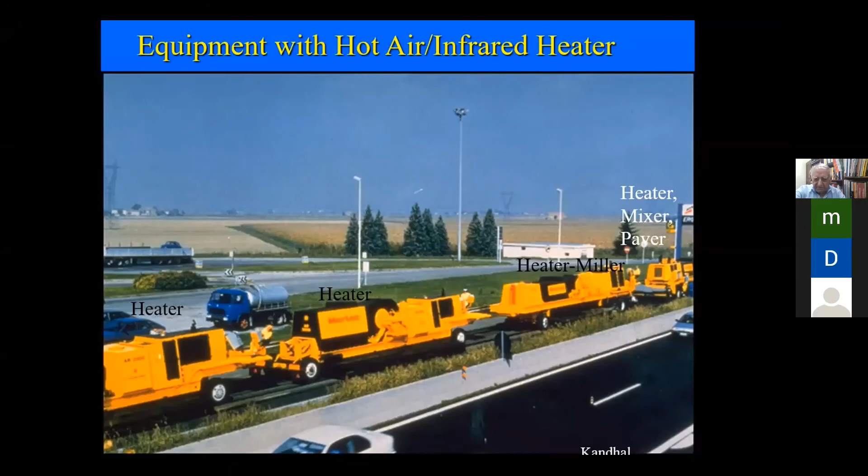And then there is also a mixer here in the back. So you put 30% extra bituminous concrete in there. You mix them both, it's like a mix of mixes in a pug mill, which is also traveling on this side, and you lay down and compact. So this was the first job in India for this equipment, and what happened is that they did this job.

And in July, the monsoon started, so they had good rainfall in Gujarat. And within a matter of a few weeks, they have this kind of problem. I mean, it's very, very disappointing. You brought about a very expensive equipment, you did the first job of HIPR, and you see this kind of fatigue cracking.

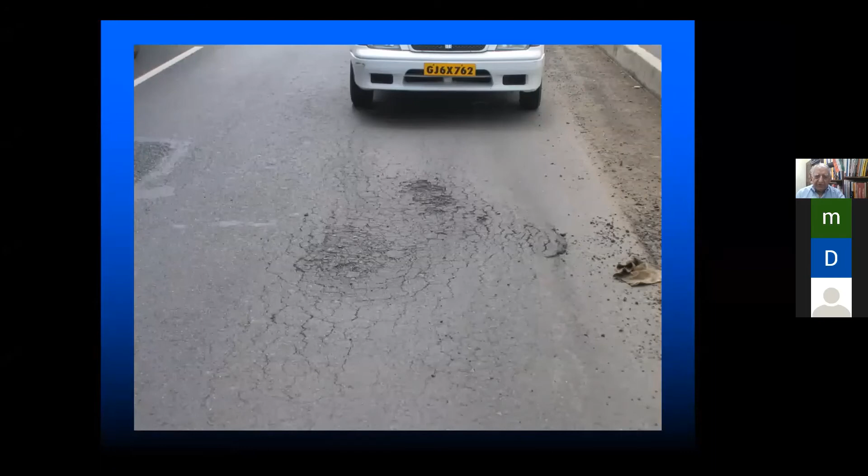You did a lot of patching. You can see a lot of patching done here, and a lot of problems here. A lot of patches were done, and the mix is kind of flowing out and all that. All kinds of problems showed up within a month. Very, very disappointing.

At that time, I was located in Jaipur, so they called me because first they called the Japanese engineers, and they couldn't find what was wrong, why it is occurring. The hot in-place recycling was done okay, but why is it occurring? So I went out, but I believe in doing some testing, doing some exploration, in any forensic analysis.

So I told them to bring a jackhammer. I don't want to apply any water in there, just bring a jackhammer. So what we did was that we found out that the BC, which was recycled, 50 millimeter, 52 millimeter, was very good, intact, no problem. But below that, the DBM layer, which was already existing, was just crumbling. A lot of stripping has taken place, it was crumbling.

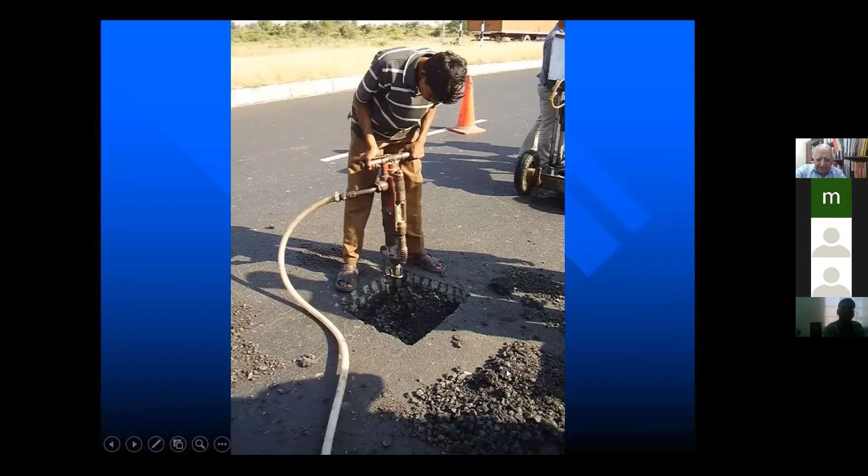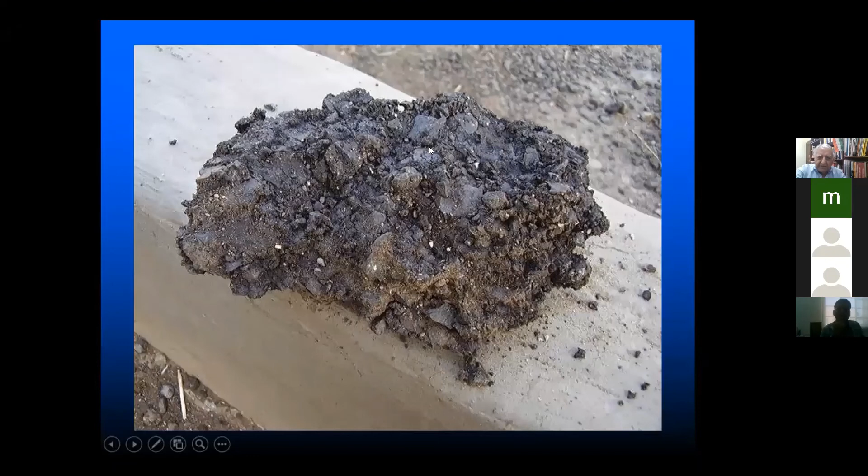So here's the picture, in the DBM, lot of stripping. You can see again particles are mixed. There is no bitumen film here. 50%. I mean, you can break this with your hand, so weak. So what I did was that I also...

Here is the DBM, which was stripped, you know, and here the WMM. So I dug up a hole here in the DBM, and I poured some water here, and the water just came out immediately from it. It was so porous, because of stripping. The DBM was so porous that when I put water in there, water just came out on the side here. Pour water here, comes out here.

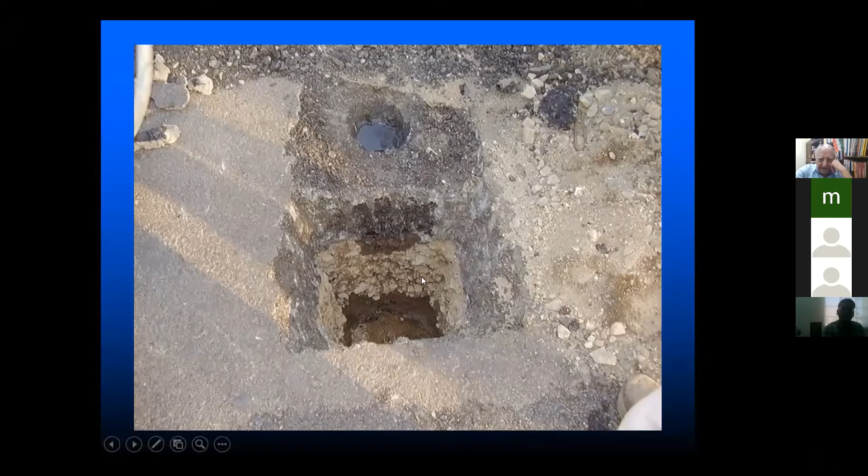So I told them that, you know, your DBM layer is bad. When you did the job, you should have taken a look at what's underneath. You just don't do a recycling of BC without looking at what's underneath, you've got to look at the whole thing. When you have to treat a patient, you do all kinds of testing, whether the patient has some problem, the blood or whatever.

Some people said the water is going from the surface down, and in the monsoon it is causing a problem. So I ran this grease test, which I developed in India, because there's no field permeability equipment here. What I do is put a grease ring, about 9 inches in diameter, and pour some water, about half an inch deep, 12.5 millimeters. Then I use a timing device to see how much time it takes for that water to disappear.

The more porous the surface, the less time it takes. When I ran the grease test here on that recycled BC, the water just stayed there for hours, didn't penetrate at all. So I told them the recycling is done okay, everything's fine, the contractor is not at fault. The DBM was already stripped, and that was causing problems. Whenever you want to do anything, you should look at the whole picture before spending money, you should look at what's underneath. That's what they didn't do.

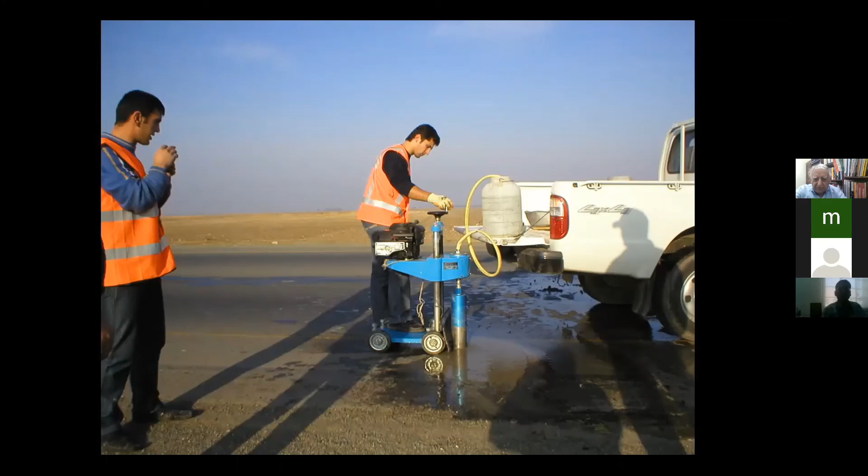Below the crack, the density was very, very poor. Away from the crack, the density was fine. In the DBM, you can call it the binder course, that's what we found out. So the question was, why was the density of the DBM or binder course low below the crack in the middle of the lane compared to away from it.

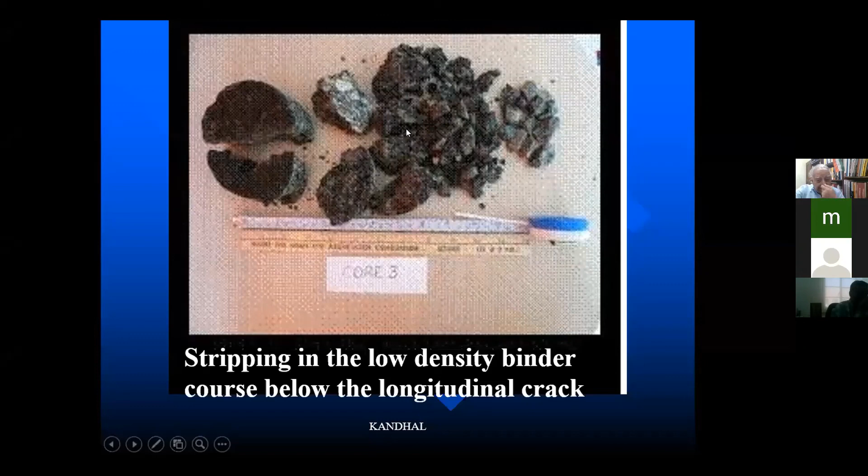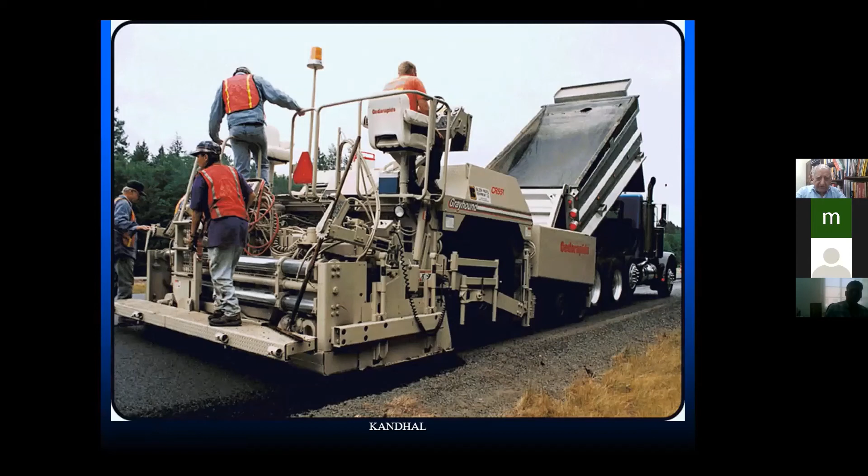For that, when you do a forensic analysis, you have to know about sometimes the equipment, the construction procedure, and all that. That makes you better equipped to solve some problems, especially when you are going overseas, it can be disappointing when you cannot solve the problem. So you have to know something about the paving equipment.

And like here, you can see there's a hopper here, and the truck pours the bitumen concrete mix here, goes back, it comes out here, and there's an auger here which spreads the mix laterally, and then it's compacted.

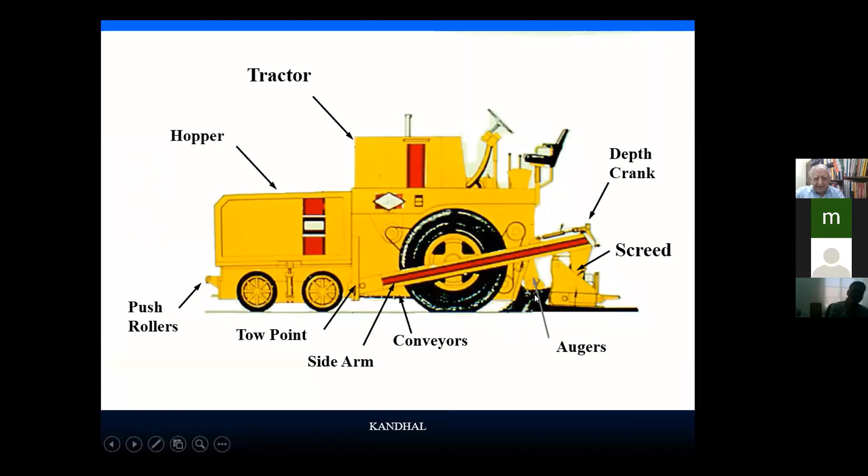So here you can see the material flow here, hopper wings, the material flows here. And then you see the auger here, which mixes and falls here, and it is spread laterally by the augers throughout the width of the paver.

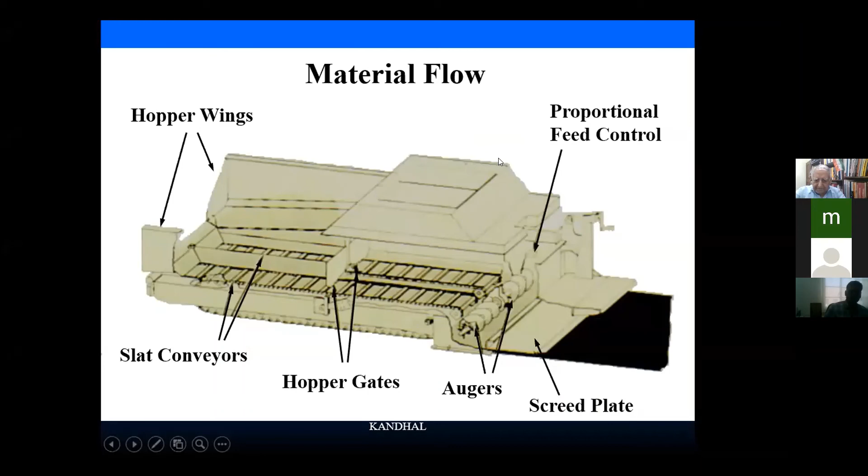Here's the picture of the auger, you see the auger here, it's spreading the mix sideways. The main problem of this project was that the auger is driven by a gearbox.

Here is the gearbox, and these are driven by a gearbox. What's happening is that the auger will do a good job of dispersion laterally on both sides. But what about the mix which is going below the gearbox? So you have to have a reverse auger on both sides of the gearbox, so you can throw in or tuck in some mix below the gearbox.

This will take care of this way, but you have to have a reverse auger, which in this case there is. You can see the direction of the reverse auger, which is pushing the mix below the gearbox, reverse on that side. So you get a good mix, packed in below the gearbox.

The paver which they had was some model which did not have the reverse auger. That's why there was a lack of density here. There was insufficient material below the gearbox, lack of density. Water was being pulled in there, and it created stripping there, and the mix collapsed and developed cracking on the top.

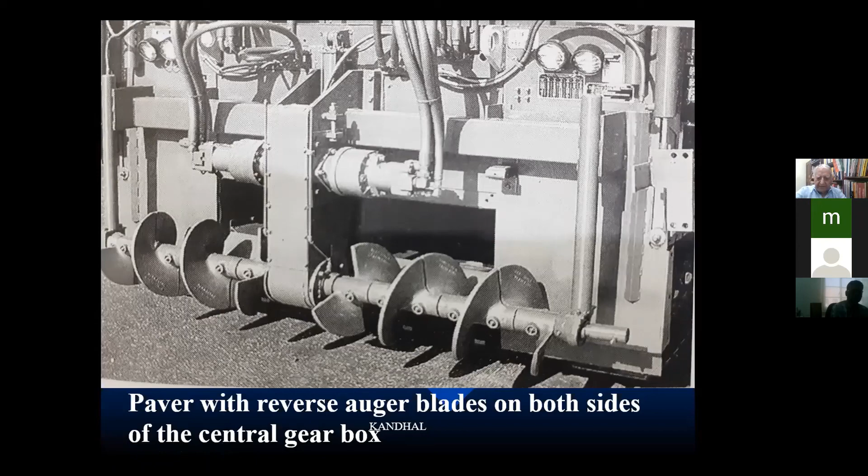So in conclusion, each forensic investigation is a new challenge. It's not the same thing you find everywhere, because the local people have tried and tested everything, and they cannot find the solution. That's why they call you on the job to find out and diagnose the problem.

So with that, I will entertain any questions which you might have. I know I took too much time, but we still have 15 minutes for questions and answers. So back to you, Madhulisha.